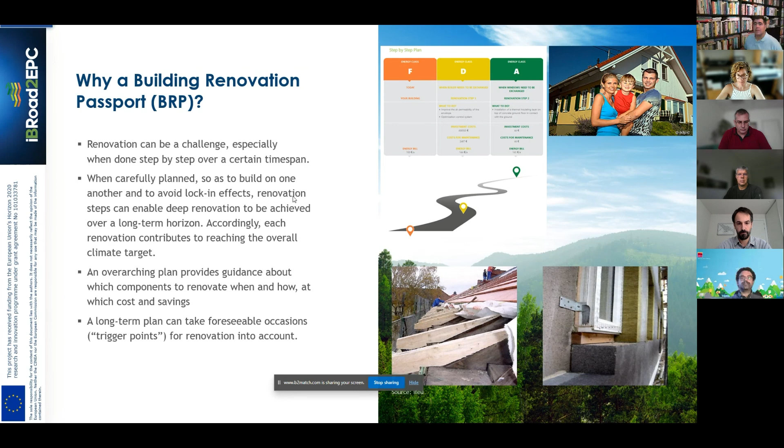It's a real project. It needs planning, and we've also seen that in Europe, the majority of renovations are self-financed and they take place over several years in several stages. So we're talking about staged renovation, and when we have staged renovation, it's quite an issue to do things in the best way, not have lock-ins, as we say, in which we have a certain choice that we make at a certain point in time that creates issues with the renovation steps that we want to take further down the road.

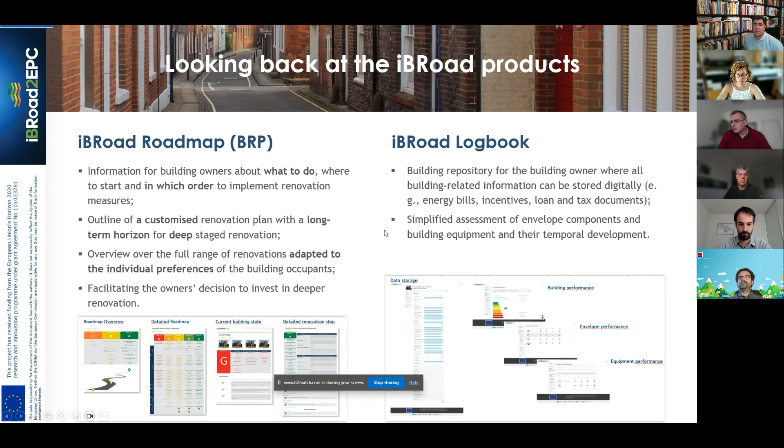There was a previous project which finished in 2020. That was iBRoad, Individual Building Renovation Roadmap, where we worked on the Renovation Passport for the first time, and we produced 2 main tools: the roadmap, which is a detailed scenario about how to renovate a building over several stages, and the logbook, which is a repository of building information, which also keeps this information in the sense of snapshots, so you can see where it was at a certain point in time, a certain stage of its renovation journey.

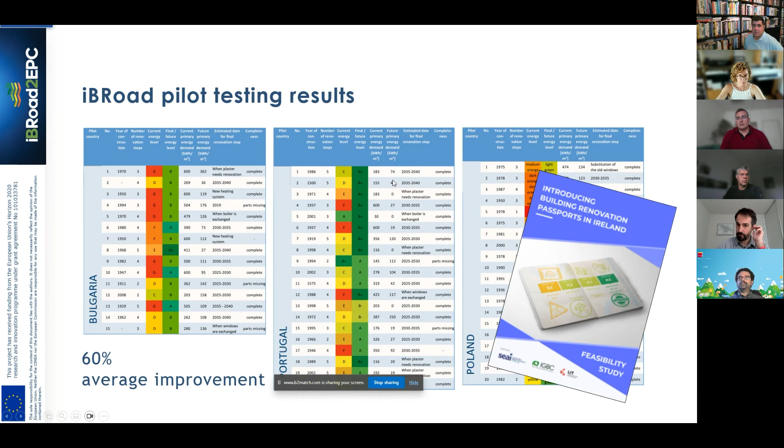But we had an issue. It was very successful in terms of the outcomes. It was tested by our own project in Bulgaria, Portugal, and Poland, so 3 of the 6 pilot countries that we have in our iBRoad to EPC project, which is the follow-up project. In addition, it was also tested in Ireland independently, thanks to the Irish Green Building Council. Our renovation rate was significant, so the achievements in terms of energy meant a 60% average improvement, so what we could call deep renovation, really, for the buildings.

However, there was a cost issue. The cost was because it required quite a lot of expertise to be put into the actual planning of the renovation.

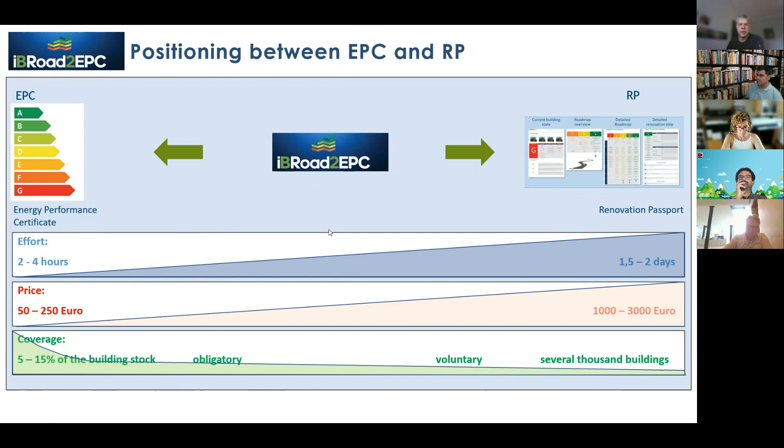Sander also showed this briefly. The way iBRoad to EPC is connected to national tools is quite easy. It's really foreseen as an annex to the EPC. This can be done very simply, so it can really be attached to the EPC PDF output as an extra page. And this page has a QR code and a URL which leads to the online version of iBRoad to EPC.

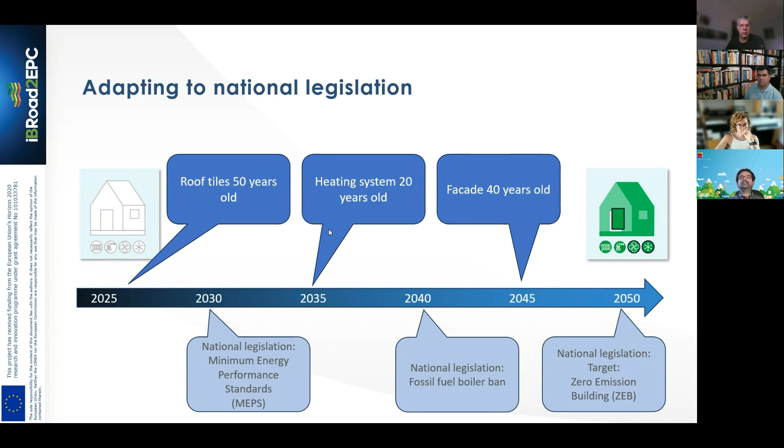And iBRoad to EPC takes this into consideration for every implementing member state. We take the efficiency classes, show them in iBRoad to EPC, and we take the real scheme from the implementing member states, and the number of steps, and when these steps are foreseen. This is oriented with the legislation in the specific country. So maybe for one country it's sensible to have only 4 steps, for another country maybe 6. This really depends on what is already foreseen in terms of legislation.

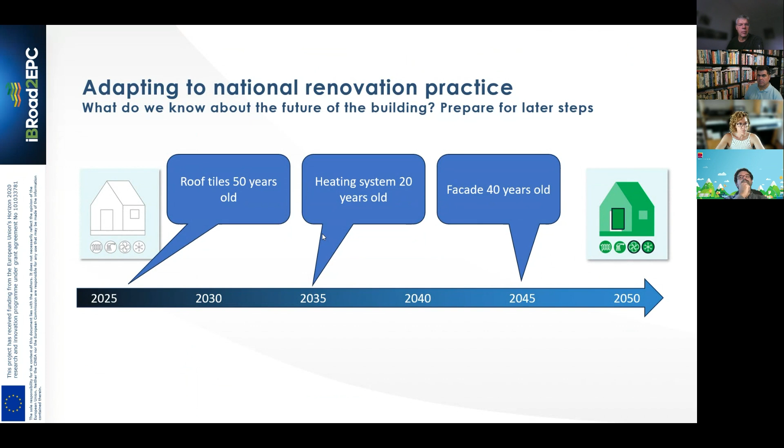And also we adapt to the renovation practice that is there in one country. Maybe in countries with a hotter climate, there's another renovation practice than in cooler countries. We can say there are certain recommendations, technical recommendations, and we have these in a database. And the issuers, the energy experts, they can choose from this database and put the recommendations into the renovation steps.

And once this sequence of renovations is defined, iBRoad to EPC automatically adds these preparatory recommendations. They only depend on the sequence of measures. So once you know you will install a heat pump in 2035, you can say, prepare for this heat pump in time so it will run properly. But this comes completely automatically.

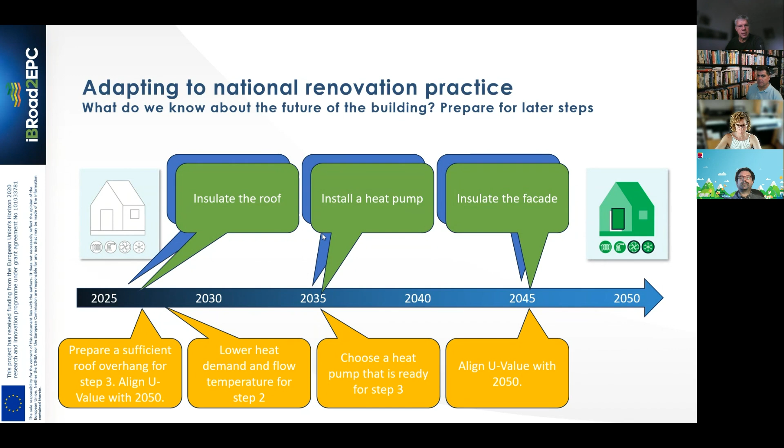And also we take on the national renovation practice in a detailed page, which explains every renovation measure in more detail. Especially we take the U-values or technical specifications as they fit in the national building renovation plans. These NBRPs are also required in the Recast EPBD. So usually, based on scenarios or national requirements, we can take mostly U-values or insulation thicknesses and recommend them automatically. But this is always adapted to the national circumstances.

And the fourth layer of adaptation is the interface, the software interface. At the bottom we have this calculating tool, the iBRoad to EPC assistant, and it's connected to a front end, a user interface, via an API interface. This API interface allows coupling it with different front ends. On the one hand, we deliver this standard front end, but we can also couple the assistant tool with especially the country-specific EPC software.

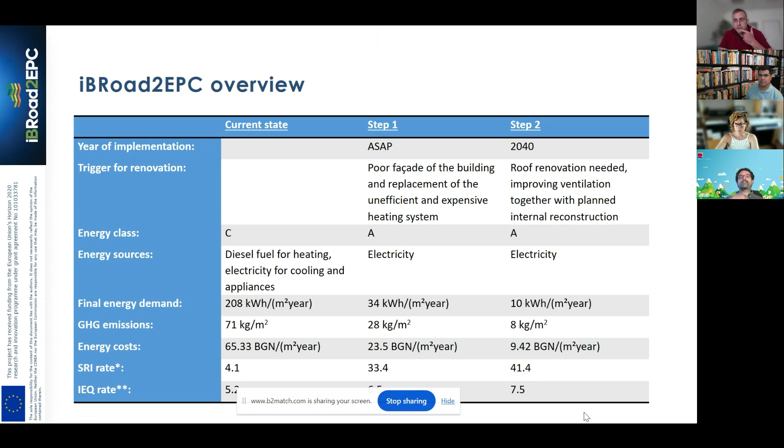If you put that through the general overview we provide with the professional service related to the iBRoad to EPC product issuing, you get the right results. You'll see that with very standard energy saving measures, you get very convincing results. Even in a case where the municipality we tackled is quite poor, quite remote, without any competence regarding NZEB or ZEB renovation, it's certainly convincing to have those figures showcased in the document we produce.

When we expand that information, show it in a very visual, nice, easy to comprehend way, in the national language — very important, we use the national language — things become easier. And actually things became so easy that the project has already been implemented.

All the advice coming through the iBRoad to EPC software, with the description of the measures and how to prepare for implementation of the next measures throughout the roadmap's implementation, has proven very useful, both for the designers and for the contractors doing the work on site. We already have feedback from the end users, and it's quite positive. So that's one of the good experiences we have.

But typically, as I said, it's not that easy. And in certain countries with a more dynamic history, like ours, you can get examples that could make your head explode at the beginning.

This simple building, quite old, very small, is used by 3 administrative bodies with 3 different budgets. It's owned by a municipality, but has 3 different bodies with 3 different budgets, different access to grants — one of the most negative features of our environment — and different projects have been implemented.

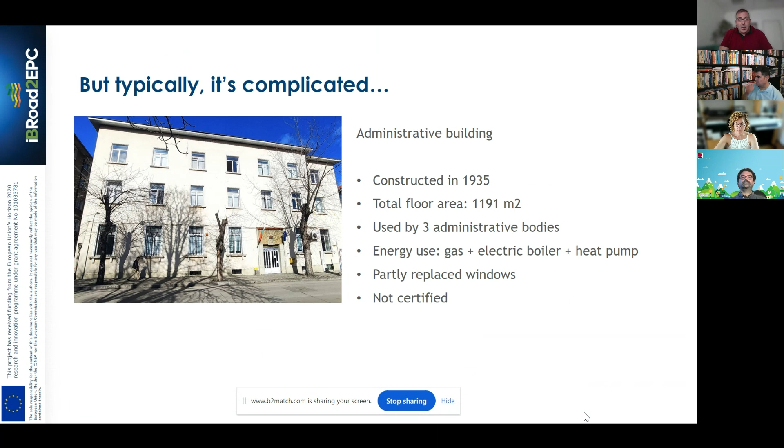But at the end of the day, even in that very complicated situation, independent of whether we apply the old iBRoad to EPC instruments and toolbox or the new ones, we get the right information and convincing results — we can get a cost reduction factor of 5.5, and that's documented and easy for everyone to understand. For the 3 administrative bodies involved, they can see the benefits and see that they're being professionally approached.

And it's written in a very clear language what has to be done, how it has to be done, how we can get where we want, how we can really achieve that savings, and what are the quality assurance measures that have to be implemented and integrated in the public procurement that would ensure us that we would receive the results.

Moving out from the public sector and getting into the residential sector in Bulgaria, that's the real issue we have to address, and it's an even more complicated story, because every flat, every dwelling, is owned by a different owner. People are either living in apartments they own, or renting. So there are 100 different stories in a multi-family apartment block, and dwelling owners are introducing energy savings measures typically by themselves—some replacing windows, some putting insulation on facades. So there's no unified system, no plan, and compromised quality of living, with no centralized heating, so every dwelling is heated in a different way. It really becomes a complicated story.

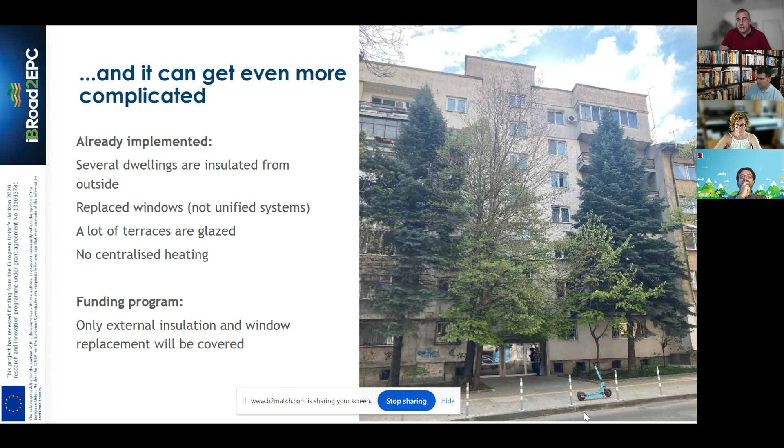And here we have the iBRoad to EPC, which provides us not only with the proof, the evidence that it really makes sense, that it can cut your cost by 3.5 times, that it can integrate measures from state subsidy programs into the roadmap, and it can lead you to a place where you're certain you're protected against risks from the energy market. One thing I believe is very important: it also gives you advice on how to deal with your dwelling to provide the best possible efficiency and the best possible comfort and hygiene conditions, so that your health is not at risk from the typical living conditions in those multi-apartment buildings.

So these 3 examples lead us to conclusions, and the conclusions are quite uniform. Basically, building renovation passports provide real flexibility and adaptability to conditions, because they take into account the typical way we renovate buildings, step by step. You can get a clear view of where you want to go, then take into account the condition of the building and its installations, and plan in the most reasonable way any single intervention, adapting it to energy policies, subsidy schemes, or the availability of financial resources—which is what we need to get convinced to engage in that renovation adventure, which is obviously not simple but quite a complex process.

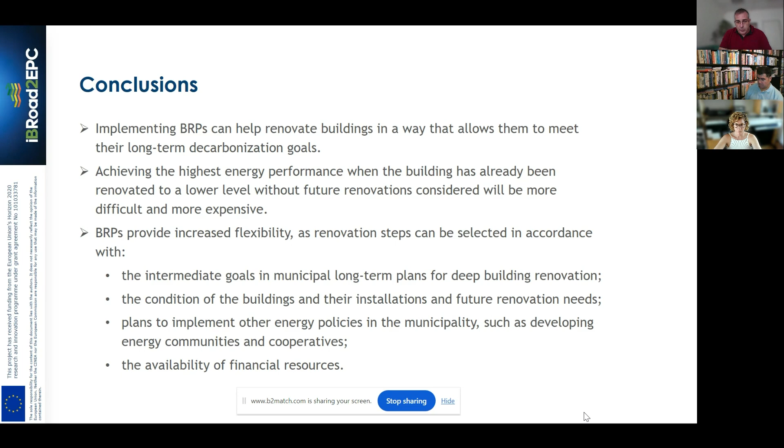So with that, I would like to thank you for your attention, and of course, if you have any questions, I'm at your disposal.

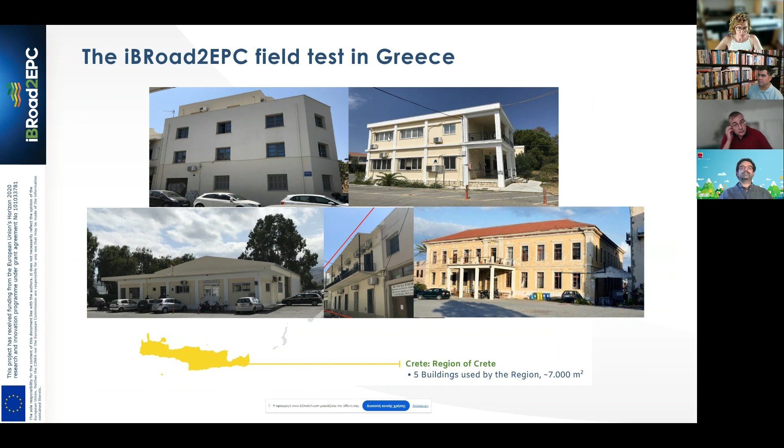In Attica region again, in the region of Crete, we tested it in 5 buildings, mostly administrative buildings, and also some more technical buildings used by the region that were all over the different regions of Crete. And the Benaki Museum in Athens, which is also a cultural building, which presented the more peculiarities regarding the cultural heritage and the restrictions that are in place in terms of what measures can be applied.

Some information about the case study that I will present, the Egaleo City Hall iBRoad to EPC preparation. This is a building that is fairly recently built in 1994. It's used as municipality offices. It has a fairly large surface area of about 3,886 square meters and 4 overground and 1 underground floor.

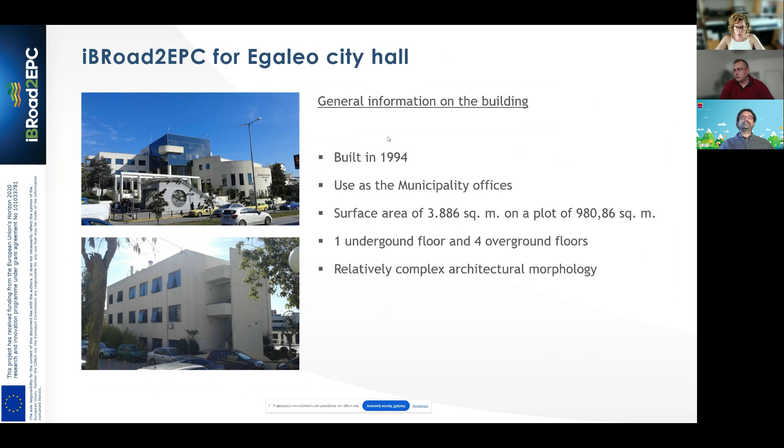It has a relatively complex architectural morphology, and it is located in a densely populated neighborhood of Attica. As you can see, it's inside the city area. So it had in place an air-cooled chiller and fan coil units for cooling.

There were also AC units for ventilation. Its equipment was well maintained. There was an oil boiler and air pumps with fan coil units for heating, and there were many different types of lamps for artificial lighting.

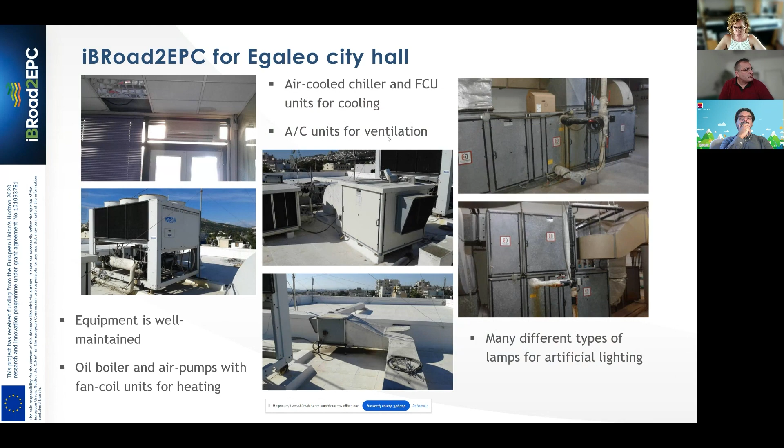So the energy expert examined the recommendation measures of the EPC that was already in place for the Egaleo City Hall, and proposed some renovation measures, and actually used these as a basis for planning the renovation steps inside the iBRoad to EPC.

The current state of the building was an energy class D, which is an intermediate, let's say, classification in terms of energy efficiency increase. And the most primary energy consumed was for cooling and lighting, and then for heating.

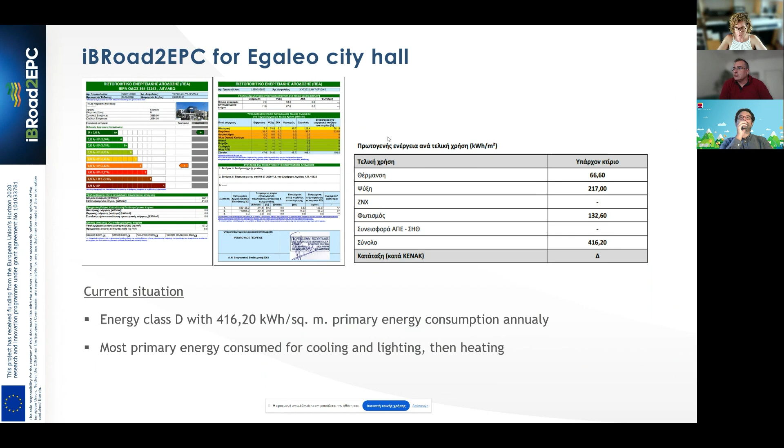So the renovation strategy was already mostly pre-drafted, because there was a strategy that was drafted from the managers of the municipality. There were some measures foreseen regarding the insulation of the envelope, the replacement of old windows, the replacement of old lamps with LED ones, and the installation of a geothermal heat pump for heating and cooling, automations and building managing systems. And later they were planning to install photovoltaic panels on the roof.

And this annual savings calculated from these measures was about 50,000 euros in operational costs, without taking into account the photovoltaic panels. So this was the strategy drafted in the EPC recommendations, and the energy expert used this as a basis to arrange the measures in terms of years in the future, and how the managers of the building wanted to do this, what grants were available for each measure.

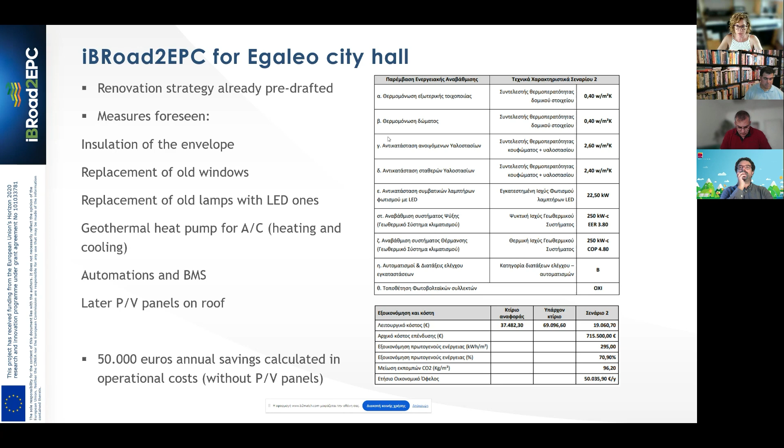So the iBRoad to EPC was drafted for the building. We can see later how this renovation strategy ended up to be on the live demonstration if there is time. But the idea is that we did this in 16 public buildings of different surface areas and different uses.

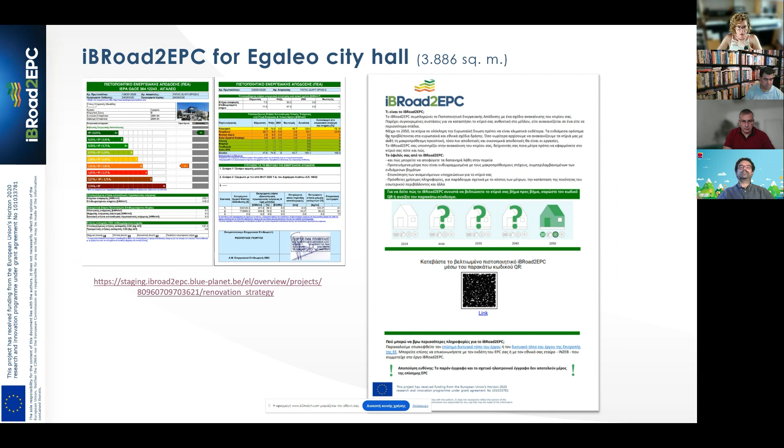Most of them were offices. And the tool received very positive feedback from the managers and the authorities that provided all the information and the material, and they participated in the field test. So that was a brief overview of the field test in Greece, and I'm available for questions if you want any more clarification regarding the field test.

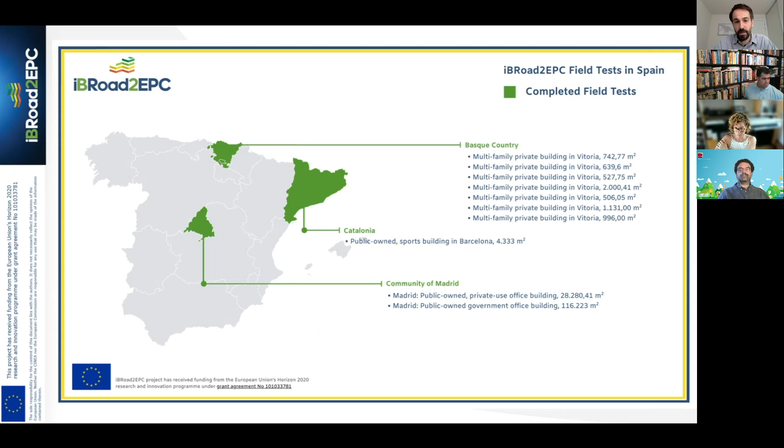The testing was divided into two phases. The first was the test of the assistant, our tool, in 10 buildings, where we carried out a general certification process with official EPC software. The experts we selected had to collect the data and enter it into the software to calculate the EPCs in the current state, a kind of diagnosis of the current situation of the building, and then calculate new EPCs for each step, each of the different measures that the auditors had previewed for that building.

So by 2030, a new EPC, 2040, and so on. The results of these EPCs, the outputs, had to be entered in this first phase manually into the assistant. Then during the project we had a second phase where we improved, on one hand, the assistant with feedback from the experts and also the neighbors. More importantly, we worked toward the interoperability or linkage of our tool with the official softwares. In the case of Spain, this was done via the XML file that all the softwares produce.

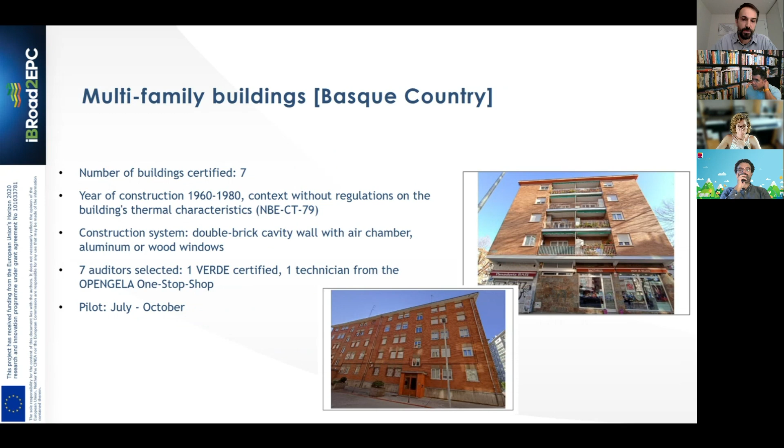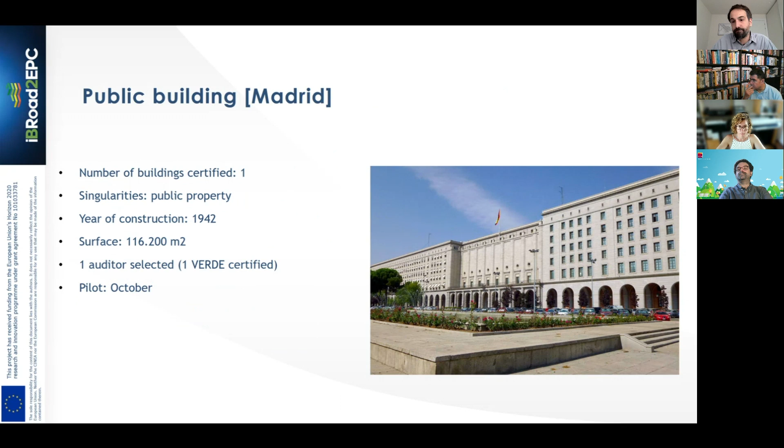Regarding public buildings, we tested, for example, an office building in Madrid - publicly owned but privately used, 28,000 square meters, built quite new in 2012. We also tested this public building, the Nuevos Ministerios of Spain, the biggest case we have in Spain in the pilot phase, with 116,000 square meters, built in 1942, so with hardly any thermal considerations. Finally, we also tested our tool in this sport building in Barcelona.

Now I'm going to present the assessment and general conclusions from the implementing phase in Spain, based on our groups of stakeholders that participated in the project. On one hand, we had the NAC, the National Advisory Committee - a group of experts who participated since the beginning and co-designed the approach for Spain, selecting modules and defining features of the assistant. We also counted with feedback from auditors and experts in the field test, with the view of neighbors of the multifamily buildings, and other receivers including owners and managers of the public buildings. Finally, we counted the comments of 70 attendees at the final national roundtable of the project.

So here I've classified them into groups. On one hand, the general vision - the NAC highlighted the principle of integrating two instruments of the EPBD, the EPCs and the renovation passports. This was highly valued since there are lots of instruments at the service of technicians and decision makers, and this approach of integrating or at least linking instruments is really appreciated, because the effort is not lost in one single instrument but can be profited by others. The experts saw iBRoad as a simple, intuitive, fast and dynamic tool. Regarding planning, one of the main purposes of iBRoad to EPC, it facilitates the long-term, of course, and the step-by-step renovation plan, as we've seen in other country cases. The expert side also saw that it improves the EPCs considerably.

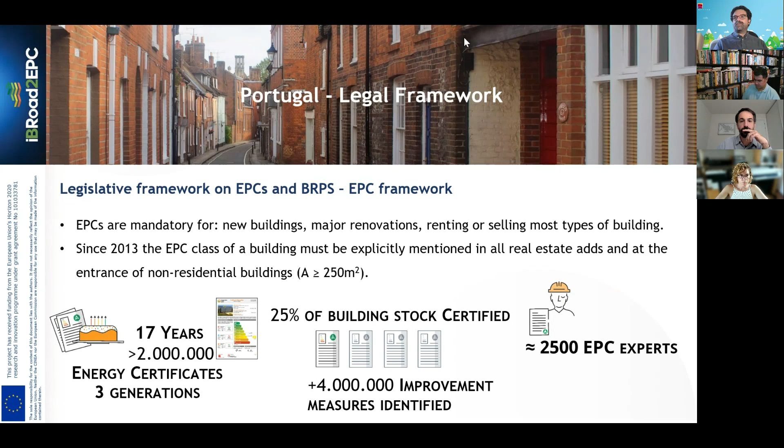So we now have a huge database of EPCs. We have 25% of the building stock certified. The database also includes more than 4 million improvement measures identified by experts, and we have 2,500 EPC experts registered doing this work.

We use all this information to create an EPC ecosystem. We use the EPC database and system for almost all our policies. At the first stage, we use this data to support policy making. We also use it to incentivize renovation actions, and I'll pinpoint one very important thing, our one-stop shop, Casa Mais, an online one-stop shop that can be easily linked to the iBRoad2EPC, something we also developed in concept within the iBRoad2EPC project.

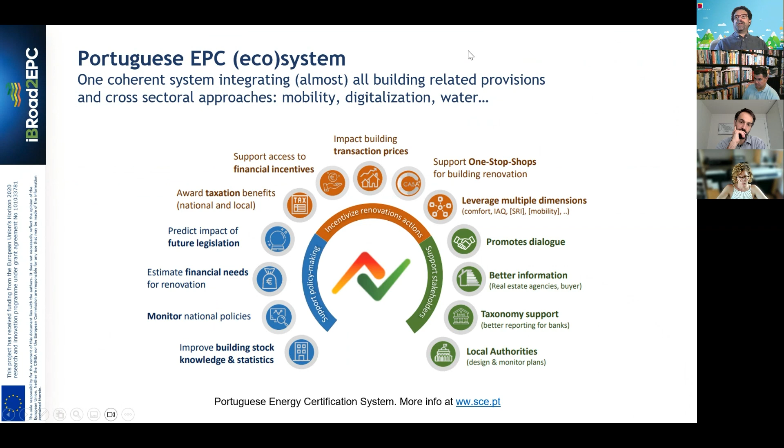Then there's the support to stakeholders, which is very relevant because it's seen as a relevant, accurate and reliable source of information. From banks to local authorities, the information in our database, much of which is also available to the public, is used. If you want more information, there's a link here in the presentation.

Our policy priorities are, obviously, the EPBD transposition, and here ADENE now has a critical role in the EPBD transposition in defining the technical requirements. Then, related also to the EPBD transposition, the update of the EPC scheme. This is also our work in the coming years.

Then, very relevant, building renovation: the implementation of the long-term renovation strategy, which will now be named the National Building Renovation Plan, and comfort improvement and energy poverty reduction, also linking all of this to funding schemes, which is something we now support in some public funding schemes. Energy poverty is very relevant, and also relevant to the example I'll show you in a minute. Actually, we at ADENE are now responsible for the Energy Poverty Observatory and for 50 physical citizen spaces across Portugal.

We want to use not only our one-stop shop, but also the iBRoad2EPC tool to support the kind of information that we provide to citizens in these spaces that are being developed.

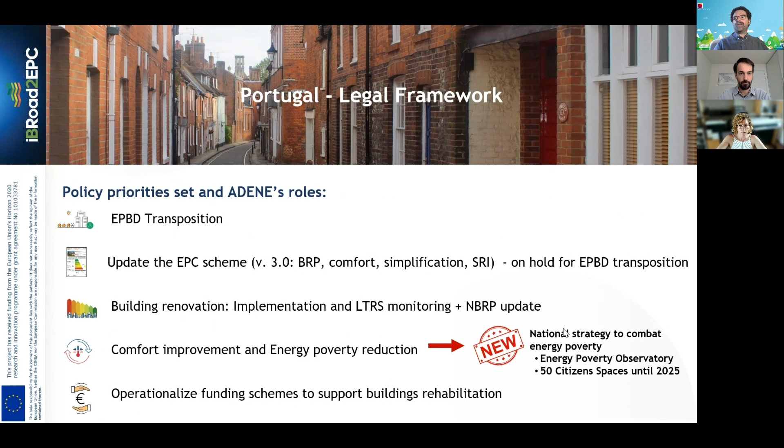So physical one-stop shops. This is just a highlight of a measure of our long-term renovation strategy. The iBRoad project served as an inspiration, and the long-term renovation strategy already has a measure on the creation of the Building Renovation Passport as an optional instrument that complements the energy certificate. So this is something that is already in our legal framework.

The long-term renovation strategy was also a guide for what we embedded as targets in the iBRoad2EPC databases. This has been fully developed, so it's information to the auditors of what they should expect of their building or their type of buildings in the coming decades.

So we included all this information in the iBRoad2EPC, and now going in detail to the test phase, we had mainly buildings in Lisbon, multifamily buildings, lots of multifamily buildings, public social housing buildings, and then also some large building offices and secondary schools, and a very small house in a kind of degraded area in Porto, a single family house, which was also an interesting case, but I will not go into detail on that. This was actually done by an expert that voluntarily wanted to join the project and did all the work.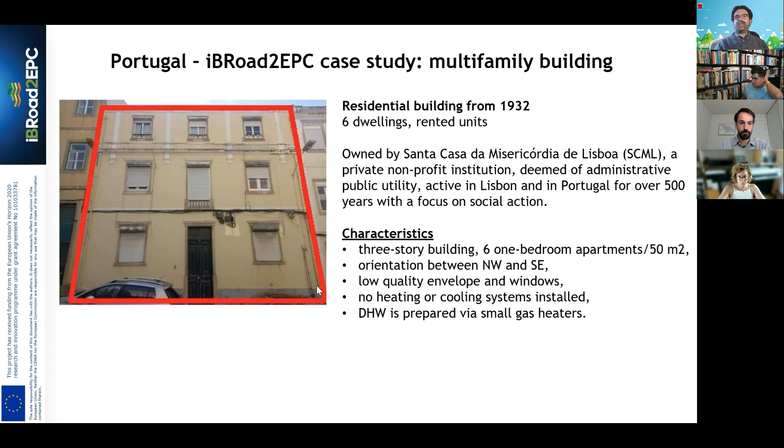Domestic hot water is prepared via small gas heaters, but we know that, for instance, one of the residents does not even have anything to heat the water. So there is energy poverty identified here, although not officially. I mentioned already the poor state of conservation, so we start off with the worst energy class that we have in our country, which is F. And there is this energy poverty that we really wanted to address, and it was common in most of our buildings.

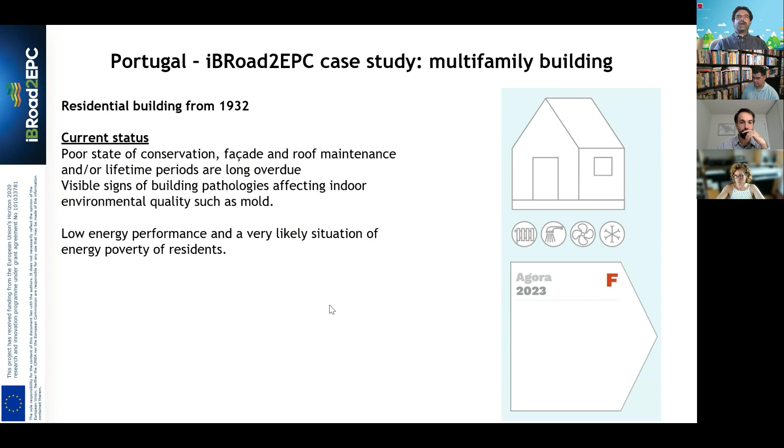So the benefits of the renovation that was prepared by our expert: the financial capacity of the institution is very limited. In fact, they had quite a crisis before because of COVID, because they are a social institution, and costs went up during COVID, so they entered a bit of stress. So this step-by-step approach was really welcomed by the owner of the building, which is an institution.

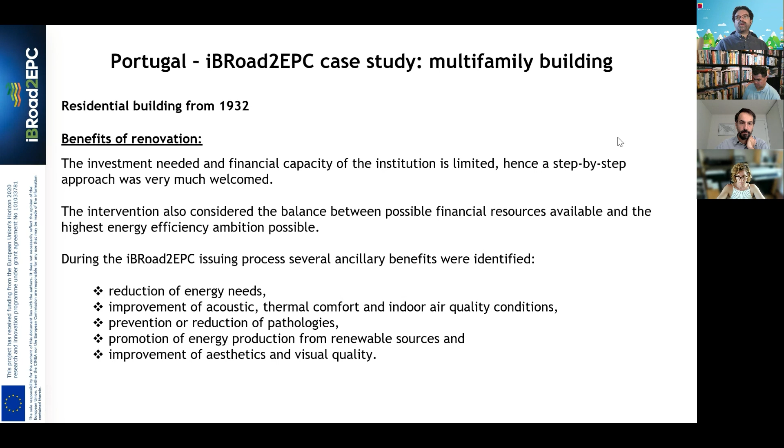The intervention considered the resources available, but also the highest energy efficiency ambition possible, and you'll see what the final outcome of this renovation plan was. We also identified several extra benefits like the reduction of the energy needs of the residents, the promotion of energy production from renewable sources, and the improvement of aesthetics and visual quality. But most important also is the reduction of building pathologies and increase in thermal comfort and indoor air quality conditions, which were not that good.

So the renovation proposal in brief terms was a total refurbishment of the building envelope, solar thermal and efficient backup for domestic hot water, highly efficient windows labeled CLASSE+, which is a label that we at ADENE manage and certify for high efficiency windows, and a biomass system for space heating.

It was not thought like this, but most of these systems also impact the SRI value and the IEQ. So we had an increase of 38% in the indoor environmental quality indicator, 14 times in the smart readiness indicator, but we were starting off from a very, very low basis, so that's why we have 14 times more, and a decrease in the emissions, energy, and energy costs by quite a lot.

So the investment, average investment in each stage per dwelling is 3,700 euros, which is not that high per stage on average, and then an average 1,000 euro annual reduction for the energy bill. Additionally, this investment was also to make sure that the building was future-proof. The institution also lives a lot from their real estate value, so it's something that they valued a lot, that the value of their building was improved, and also the quality of life of current and future inhabitants was very relevant for the owners and for the residents.

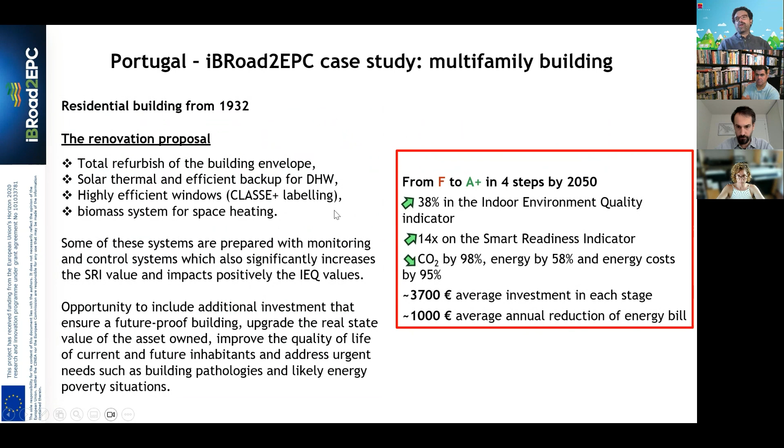With 4 steps by 2050, we managed to go from F to A plus in our current energy label. I probably will not go into detail, I think we are a bit stranded in time here, but this is just a brief outlook of the renovation steps that have been defined.

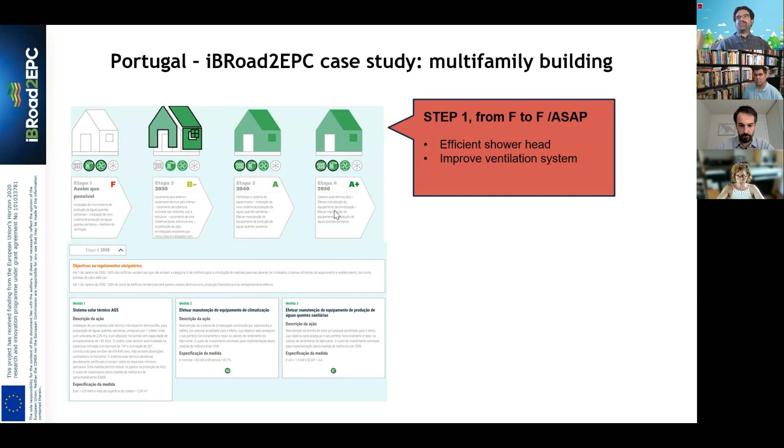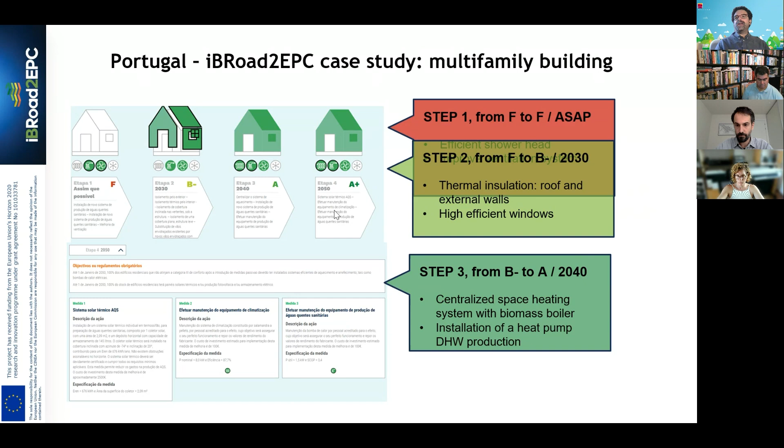First, just some efficient shower heads and improve a bit the ventilation system, not big. Then by 2030, already going to B minus with thermal insulation and high efficient windows, also taking chance of the building's need of maintenance. Then in 2040, higher investment on centralized space heating systems and heat pumps for domestic hot water. And then in 2050, the solar thermal system for domestic hot water and the maintenance of the space heating system.

This is the overall view of the passport, and here you can see the evolution of the indoor environmental quality indicator. We started off at 5.4 and went to 7.1, which is a good value for the indoor environmental indicator. Just some numbers here, I'll leave it for curiosity, so if you want to look at it in more detail you can check our presentation, and for any question just get back to me.

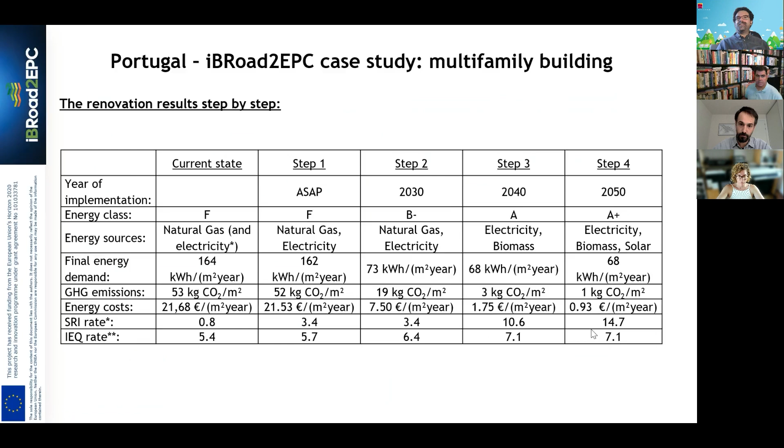And that's it, thank you very much. My contacts are also here, so thank you.

Wonderful, many thanks. So Jean, you can stop sharing, and then we can spend a couple of minutes on the one question that has been posted. So the question is about the trigger points, and I think we can have a round again of the countries here. I'll ask in the same order, I think everyone is here. I'll ask first Dragomir, then Eleftheria, then now that Joao is connected, Joao, and finally Ander.

About the trigger points: yes, that's a very important and operational question, because we've seen starts and stops in the interest towards renovation measures, and that's something we really need to address in our general policies regarding the built environment. In Bulgaria, the typical trigger point is the availability of public funds for subsidy schemes. It's a nightmare, it's something that has been blocking sustainable development for many years. We must make sure there is a continuous, stable and predictable program that supports renovation, requiring certain investment in intellectual labor - consultancy services targeted to really prove that the building stock could reach the best standards and carbon neutrality towards 2050. That's something in the realm of policy making.

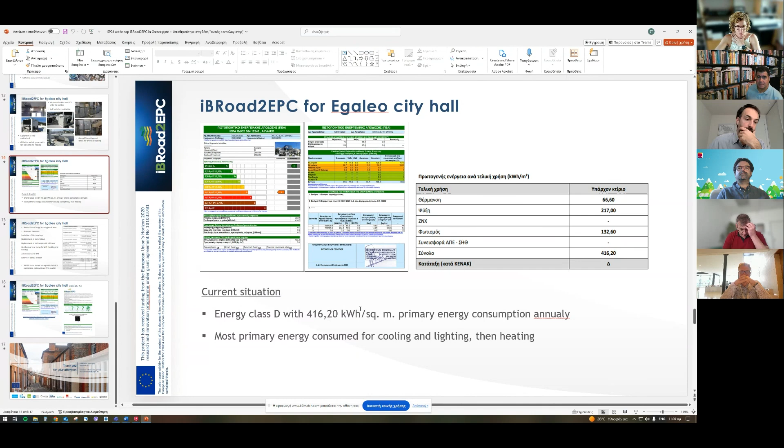Yes, no problem. So I will present this case of the Egaleo City Hall. As I mentioned before, the current situation was energy class D with 416 kilowatt hours per square meter in primary energy consumption annually.

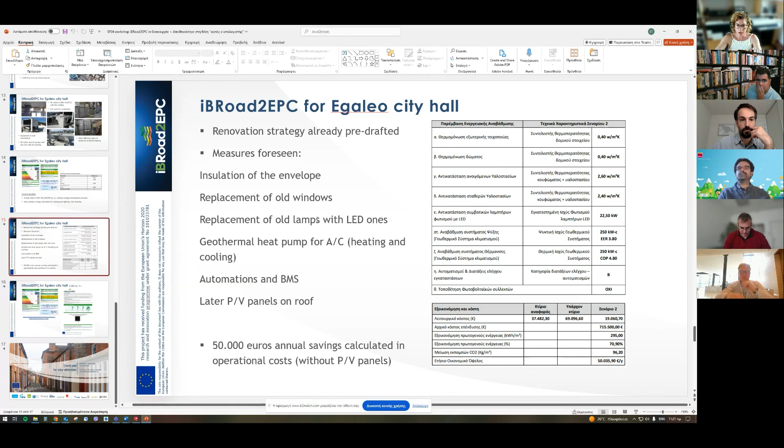So in 10 years' time, let's say, this renovation strategy is foreseen to be finished. So we have here the current situation, where we have the D energy class, which is the current situation of the building.

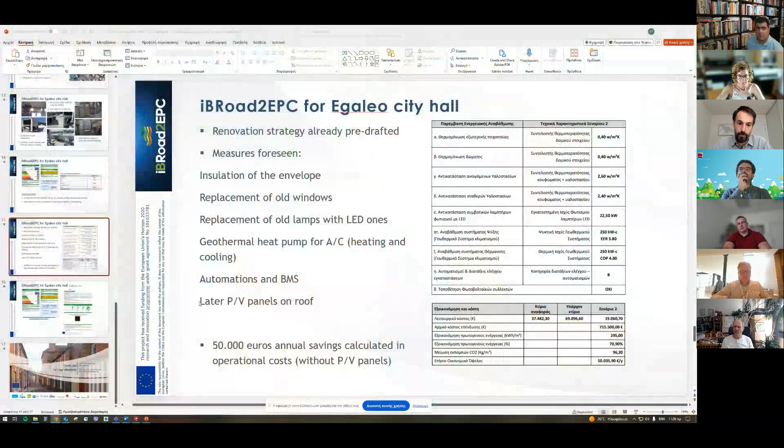Thank you very much. I think it's worth noting that the texts that appear there as instructions, as advice, are pre-filled, in the sense they are prepared already in the database. Of course, the energy expert can edit them if needed, but the fact that they are prepared and filled in for the particular steps makes things much faster.